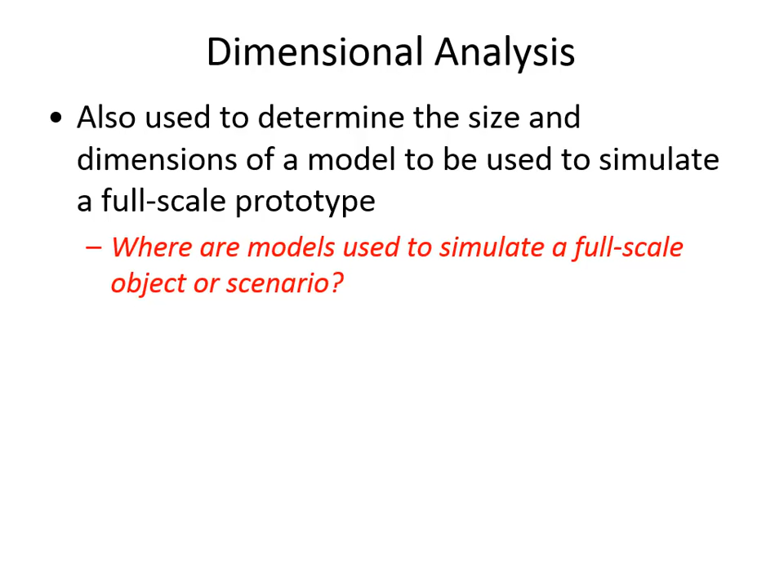The process of dimensional analysis allows you to find out, for example, what dimensions of a model airplane should be used to realistically simulate flight conditions in a wind tunnel. So if you have a wind tunnel and you're going to be trying to design a more efficient wing, you'd go through the dimensional analysis process to find out what wind speed should be used if you've got a small model. This small little wooden model is just an example of the fact that sometimes an enormous full-size airplane would be tested at the smaller scale.

So this airplane is landing maybe at about 170 miles an hour. So that's the wind speed over the wing. So if you miniaturize that, and you've now got a small model that you're putting into a wind tunnel, what should the speed of the wind be? If it's a 1 to 8 model, does that mean that you should make the wind go 1/8 the speed? Or should you make the wind go 8 times as fast? Or is it the same speed? How do you get the forces to match up on a proportional basis?

And think about a little Matchbox car that they sell at Walmart for about $1. Probably everybody's owned one of those little metal Matchbox cars at one time or another, or at least played with them. Think about if I had one of those and I picked it up and I dropped it from chest height and it falls to the ground, probably nothing's going to happen. It'll be as good as new. It's not going to have the same effect as if you took a full-size vehicle and you dropped it from a proportional height.

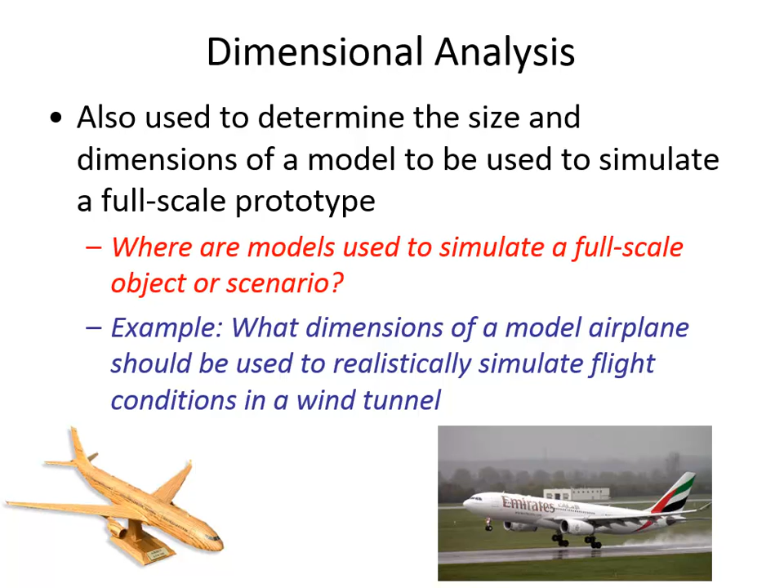You need to make the metal doors much thinner than they are. You know, the problem with the Matchbox car now is it's too strong, right? Because it doesn't fly apart the way that it ought to. So dimensional analysis will allow us to predict how the relationship is between model and prototype.

One aspect of this field of study is looking at equations to assess whether they are homogeneous or non-homogeneous. Now, a dimensionally homogeneous equation is when the units on both sides of the equation match up. And ordinarily, if you have a homogeneous equation, that means that it's somehow fundamental, that the equation is built on the realities of science and the physical world.

So take, for example, this equation that's shown on the screen here. This is a weir equation. We didn't get to play with weirs in the lab this semester. We'll talk about weirs next semester. But what a weir is: if you've got a river and then you put in some sort of an obstacle, the water level rises and rises. Eventually the water level will rise and water will flow over the side of that weir. This is a sharp-crested weir.

This equation says what flow rate you can expect, based on how tall the water is, what is h, and how long is the weir, the depth into the page of the weir length, and C is a unitless coefficient of discharge that takes into account turbulent effects, sort of like the discharge coefficient that we used in the orifice equation. So in this equation, Q, we know from experience, has units of cubic meters per second. That's the left-hand side of that equation.

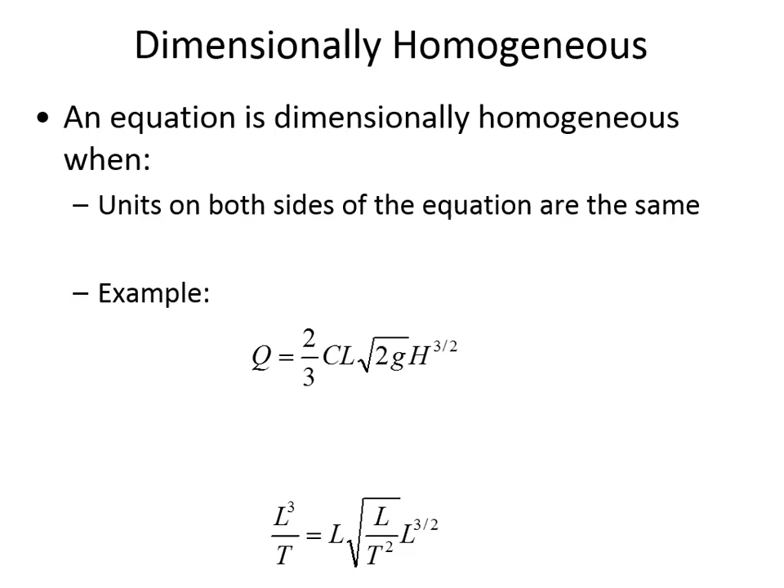It's a process that helps us to see what an equation should be to predict performance. And that's what we'll get at the last of class today, take a look at the process that is undertaken of analyzing variables to make new equations. Well, let's talk about similitude before we get into that.

Here we have a model and a prototype. The model, M, is the smaller device, and the prototype, P, is the bigger device. You can see here this looks like a pair of boats, and they have geometric similitude right now, meaning that their physical dimensions have been scaled down so that the length of the model is, in this case, maybe half the length of the prototype. And correspondingly, the width of the model is also half of the width of the prototype. And in another dimension, the height, everything's been scaled proportionally. That's what geometric similitude is.

Now, geometric similitude has that problem that the model is going to be too strong. It's not going to predict the performance of the prototype if we scale the size down, because forces don't scale linearly. And think about the strength of things. It's much easier to snap if you have a stick.

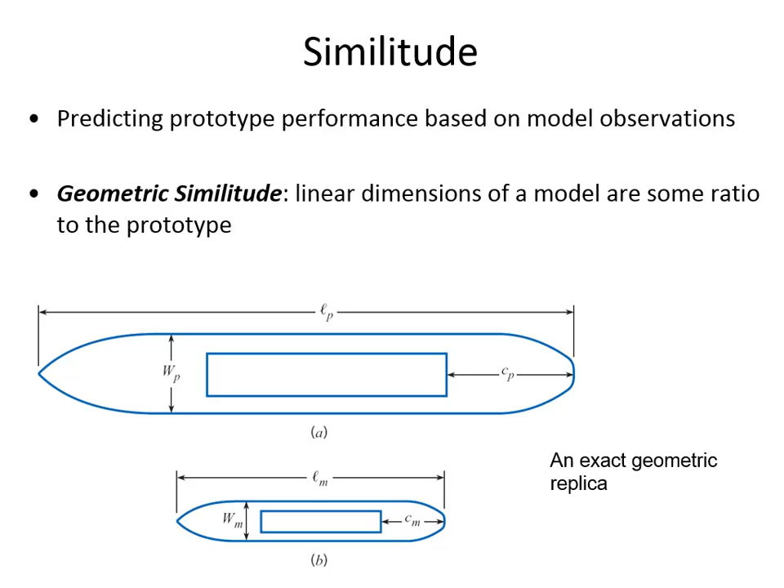A 2-foot-long stick snaps very easily because of its length relative to the cross-section of the stick. And it snaps far more easily than if you have a 1-foot stick. It's not like the 1-foot stick only takes half or double the force to snap it. There's a nonlinear relationship between forces and size, and that's where dynamic similitude comes in.

When we're trying to honor dynamic similitude, the idea here is not that we want the sizes to be the same. We don't necessarily want to have everything scaled so that the model and the prototype have the same size, but what we're more interested in engineering most of the time is to make it so that the forces are matched, so that there is a scaling of the forces.

What's illustrated here is, what if we had a spillway on a dam. So this dam is holding back water. When the water level gets to a certain height, it starts flowing down the face of the front of the dam. This is called the spillway.

So if we wanted to go into the lab and build a little model to try and predict how the large size prototype is going to behave, rather than having this model scale on size, we'd try and make it so that the Reynolds number of the model and the prototype match. We'd calculate the Reynolds number, and you remember that Reynolds number is velocity times diameter divided by kinematic viscosity.

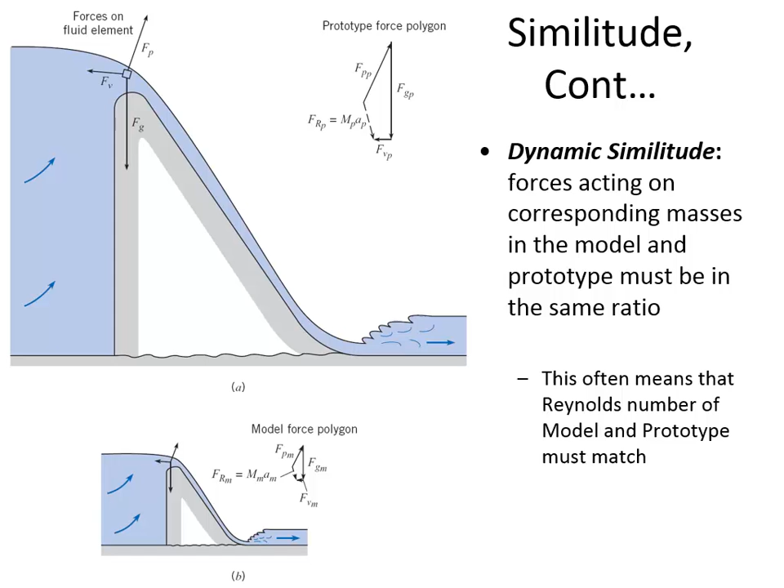And that's a way of calculating Reynolds number, or it is rho v d divided by mu. Well, I always just write it in terms of this. Kinematic viscosity is absolute viscosity divided by density, so it would be, no, density's on top, right? And the dynamic viscosity on the bottom. So Reynolds number is the key to getting dynamic similitude to match up.

The things that we can control in a modeling environment: let's say that you are going to be testing a wing in a wind tunnel. You could adjust parameters like the velocity of the wind through the wind tunnel, or you could change the fluid. And actually, that's sometimes what they'll do. Rather than having a really fast-moving air, you could increase the density of the fluid that's being tested to water, and then have a slow-moving water. And you could get the same forces acting on a wing with a fast-moving air as a slow-moving water.

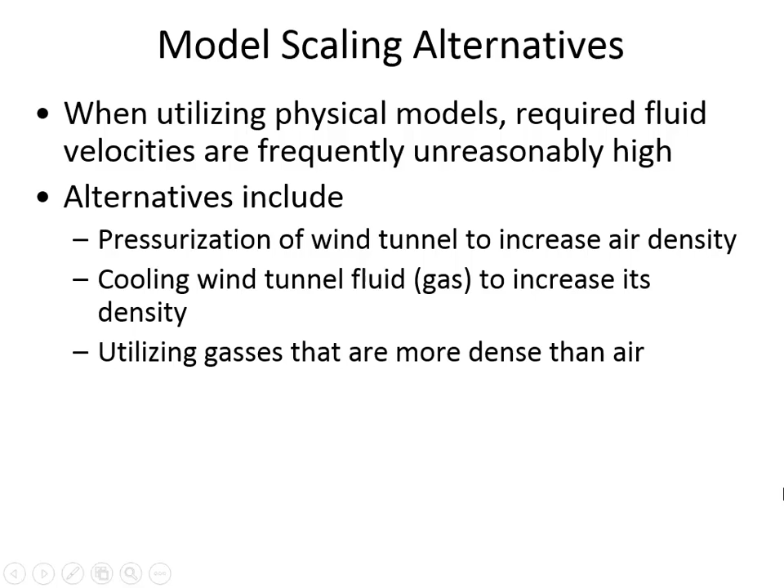And so you can adjust a variety of different parameters to maintain the dynamic similitude. You could cool the gas to increase its density, and then that would change the forces as well. And so here's a little calculation example that shows how we can use the Reynolds number similarity in order to ensure that the forces on a model will be the same as the forces on a prototype.

Here we have a blimp. The full-size prototype is 60 meters long and 5 meters wide, and then the model is 1/10 the size of that. And the full-size prototype is going to fly at 10 meters per second, and so if we want to test a 1 to 10 size model in a wind tunnel, what should the wind speed be?

And what we're going to do is ensure, in this instance, that the Reynolds number is maintained. That's how we know the correct velocity. And so earlier I asked that question, if you scale it down, does that mean that the velocity will be reduced or the velocity will be increased? And this is what will answer that question.

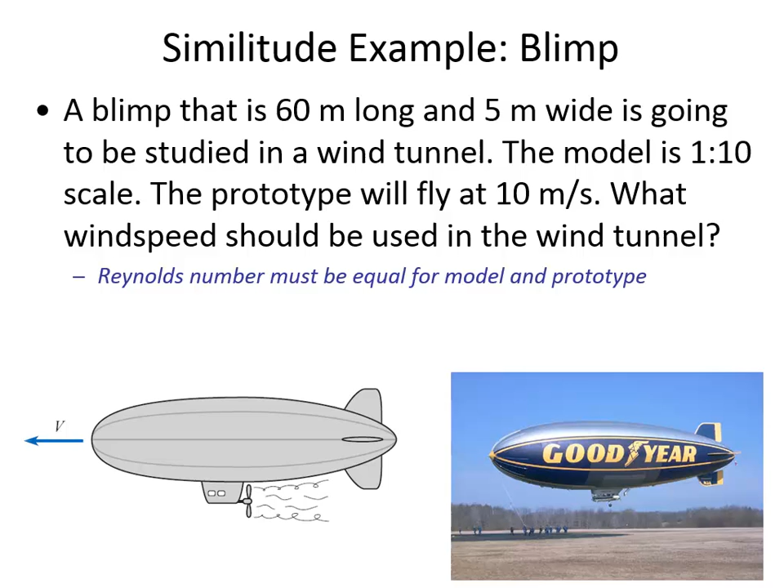Here's another one. All right, I'm going to let you do this one independently. We've got oil flowing through a smooth pipe. We know the diameter, we know the viscosity of the oil that's flowing through the pipe, and we know the velocity that the oil goes through the pipe. What if we wanted to model the behavior of that 15 centimeter pipe with a 5 centimeter pipe, and it's going to be water instead of oil, 20 degrees Celsius water? So what flow velocity would allow there to be similitude in this case?

There's one thing I haven't given you that you need to know. What's the unknown property that you need in order to solve this question? The viscosity for 20 degrees Celsius water. That's right. That's what I haven't told you. Anybody remember what the kinematic viscosity of 20 degrees Celsius water is? Good. That's right. 1 times 10 to the minus 6 meters squared per second. All right. So go ahead and try and set that one up, and we'll talk about the answer together.

All right. So here we need to rearrange the two Reynolds numbers that are equal to each other, solving for the velocity of the water. That's the question, is how quickly should the water flow through that pipe so that it has similar forces to what the oil pipe is experiencing. Similar forces is what we want to have.

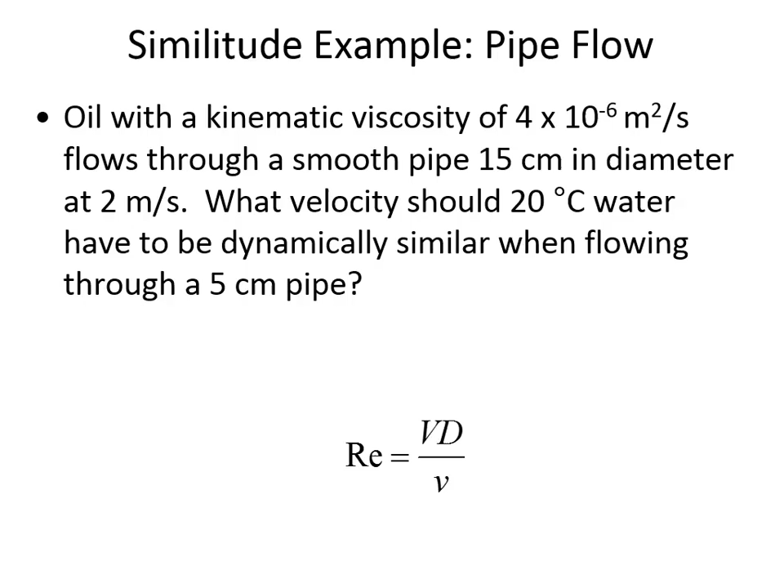Here we have a diagram of water flowing through an orifice. This is an orifice inside of a pipe. What if water was flowing and actually was going against the intended direction of an interior orifice? Here, in this case, what you can see is that the diameter of the pipe has been restricted by this circular cutout. This would maybe be like a washer inside of a pipe.

What if some circular cutout was in there and water was flowing through it, but in this case going the other direction? If we want to find out how this is going to behave, we'd have to go through a process of experimentation. And there are numerical solutions to this. We could do it with a computer to try and predict using something called computational fluid dynamics.

A computer could try and predict how the energy loss is going to behave, but it's not highly accurate because the turbulence is really hard to model accurately. And most computers wouldn't have the capacity to do enough calculations for a fine enough mesh to predict really what the pressure change or energy loss would be through here.

A full-size test, if we're talking about a pipeline such as they have up in Alaska, a very, very large diameter pipeline, and they want to have a flow restricting orifice, it wouldn't be practical to put together a full-size test in a lot of cases.

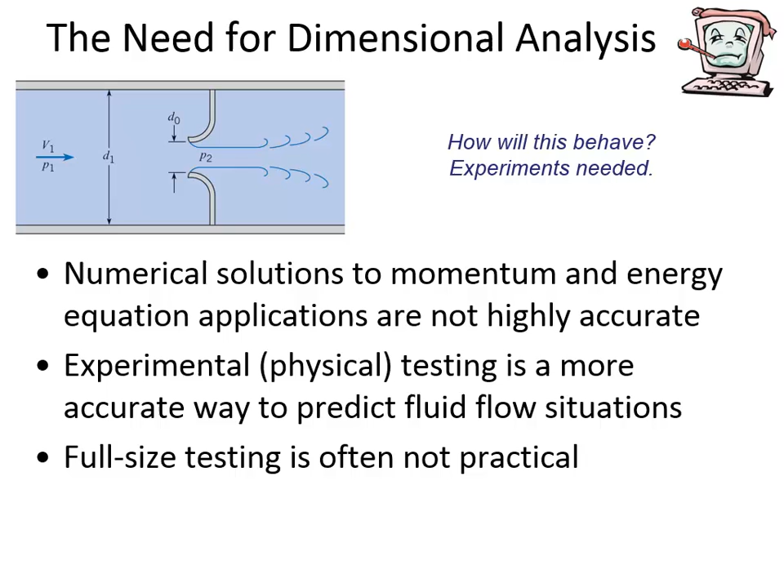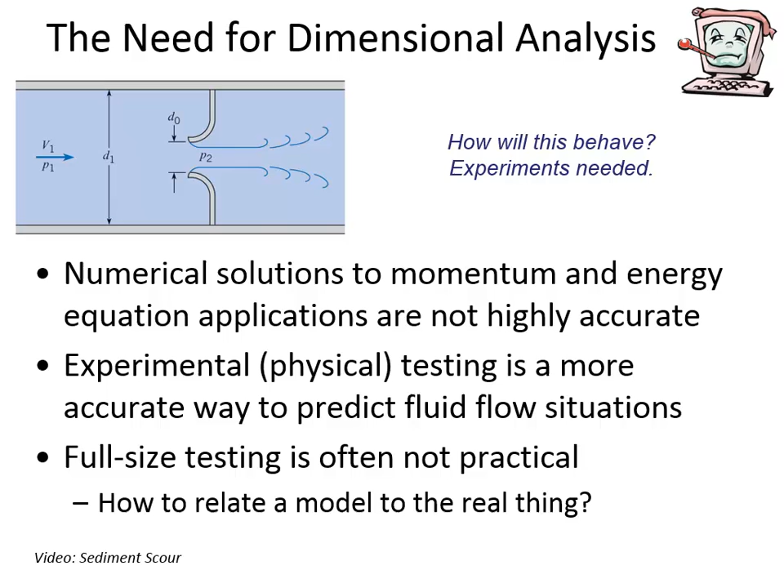So sometimes instead of having a full-size test, they'll have what's known as a pilot study or a bench scale experiment. And so the way to relate a model to a real thing can be with dimensional analysis and trying to set up a physical experiment that could be performed in the lab that would be able to predict the full-size behavior.

Let me see if I still have this video. Sediment scour. Yeah, I do. Good. Okay, this is showing a model. Let me dim the light so you can see it better.

This is a computer model of water flowing over the spillway of a dam. This is a dam, and there's a couple of different gates that water can come through and an emergency spillway. So this is showing how sediment is transported through a dam as water flow increases. This is just an illustration of what a meshed model can come up with.

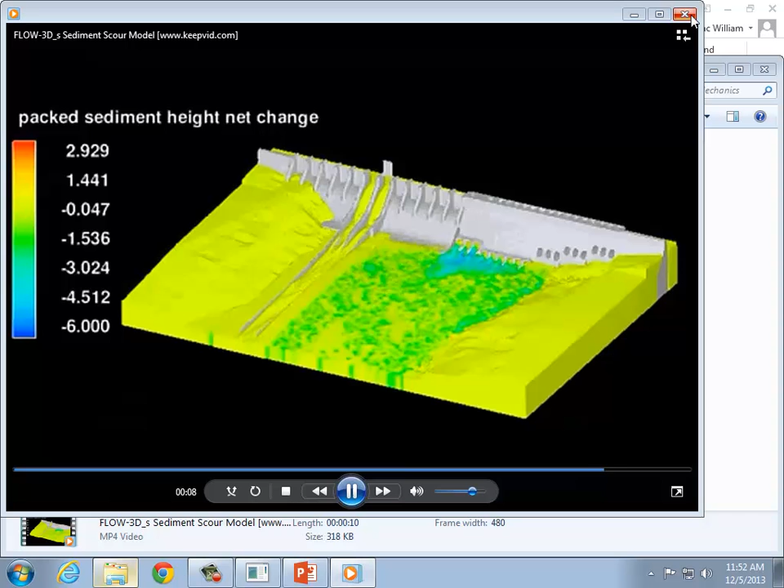And these sorts of models are sort of notorious for having really colorful pictures, and you look at it and you feel, oh, I'm learning a lot about the flow here. If you click on a certain location, sometimes it'll actually give you at that location what is the sediment change at a certain time. So models are nice when you've got the computational power available and can afford the software.

But sometimes you don't need to go to all that trouble, and you can use dimensional analysis instead to set up a physical experiment that will be even more accurate than a model would be. So dimensional analysis proceeds with a process of combining variables together that we know have a relationship to the phenomenon that's going to be monitored.

So in experimental design, we may need to use Reynolds number as one of the parameters that has to be matched in design. And here's Reynolds number. We've already been using it today in similitude. And consider the units for each of the components of Reynolds number.

I think it's raining.

The density has units of mass per length cubed. Velocity is length per time. The viscosity, if you break down the newtons into kilograms meter per second squared, that gives us, when everything's canceled out, a mass term in the numerator, time and length in the denominator. All units eventually can be broken down into three base parameters: mass, length, and time. All units are composed of those three.

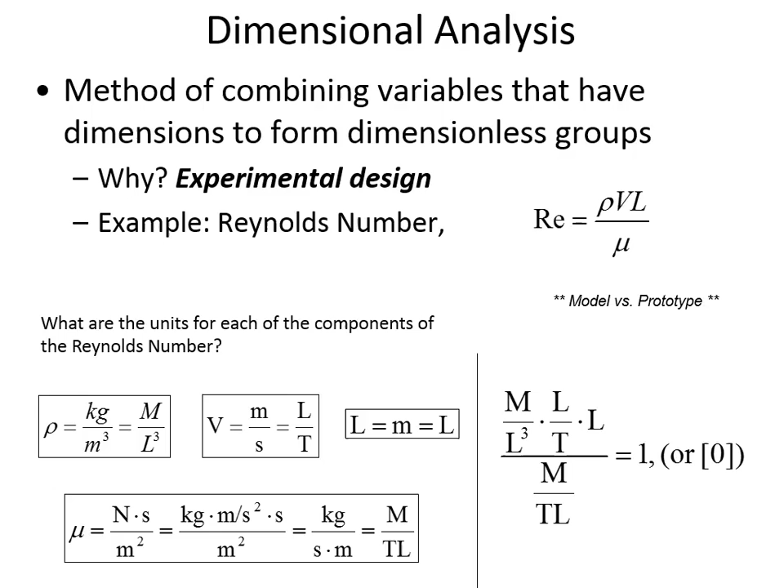So what are the units of the Reynolds number? If you combine the density, velocity, length, and viscosity, the Reynolds number itself is unitless, and we already knew that. But this is an illustration of the process: we're going to analyze the units of different variables and combine them in a certain way to try and find dimensionless pi groups, as they're called.

There's something called the Buckingham pi theorem, and your book goes into a lot of detail about the Buckingham pi theorem and how, when you have variables that influence behavior, you want to rearrange those variables into groups that are unitless. You'll have a certain number of variables that influence the behavior, and at most there are three basic dimensions. M at most is 3 because there's length, time, and mass.

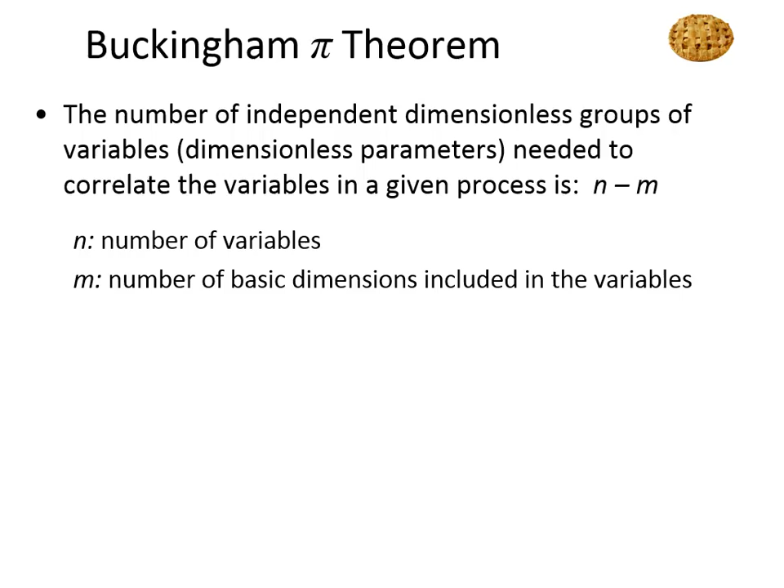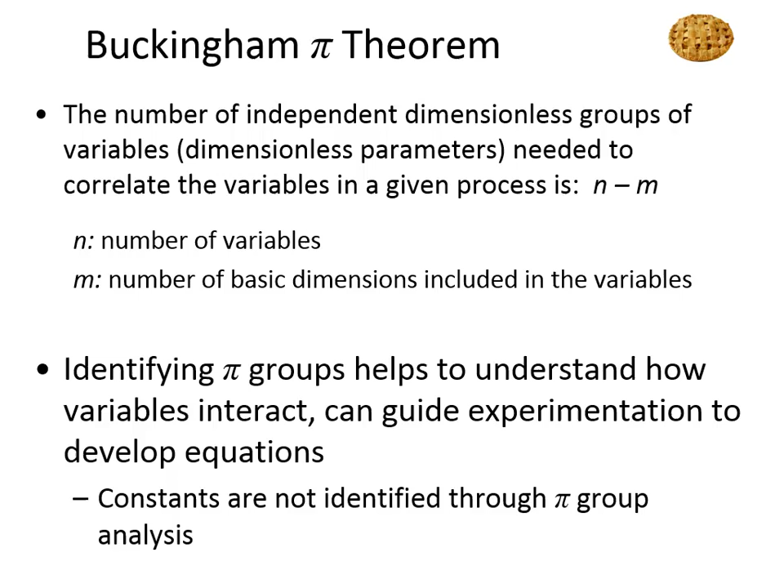And so this process of applying the Buckingham pi theorem is just identifying dimensionless groups to try and understand how the variables interact. This is all super abstract for you, and I recognize that. The best way to make it seem less abstract is to illustrate it with an example. So consider a marble, some sort of a sphere, that's falling through a fluid.

The drag force on a sphere as it falls through the fluid, the force resisting its movement, is a function of how quickly it's moving, the velocity. The drag force will increase with the density of the fluid and the viscosity of the fluid, and we also know the drag force is a function of diameter. What dimensional analysis and the study of Buckingham pi groups can tell us is the equation that relates force, velocity, density, viscosity, and diameter.

If you were back in the lab doing lots of experiments, maybe you have different size spheres, and you notice the drag force changes depending on the size of the sphere. And you notice the drag force changes when you change the fluid because of the viscosity and the density and so on. This process allows us to analyze the variables to find the equation that predicts what the drag force should be. So let's go through that illustration and I'll show you what the Buckingham pi theorem process is like.

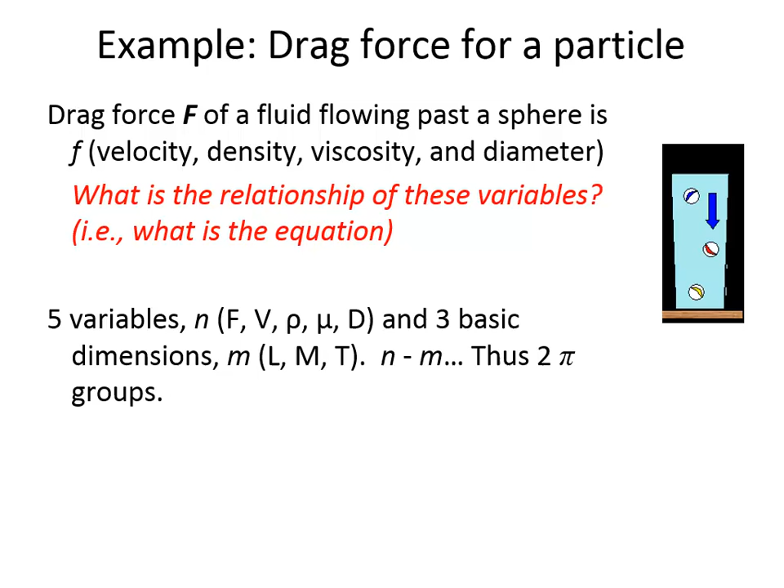Well, we've got a minute and 40 seconds left in the semester. I think I'm going to let you out early today, because I'm such a big-hearted guy. Let's just look one last time at the announcements, and we'll be done.